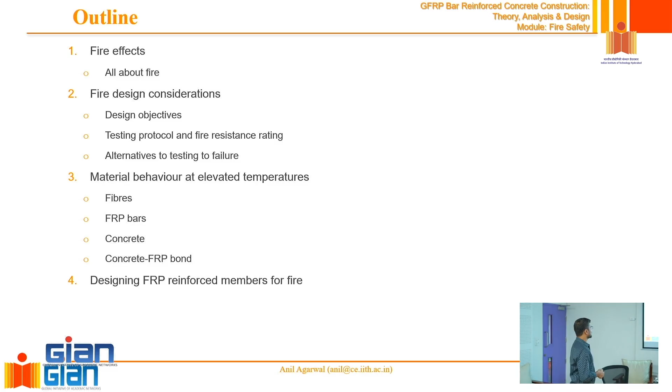For other traditional members, RC, steel, protocols are available, design provisions are available, you can design according to that. But when it comes to RC with FRP, protocols are not in place yet. So whatever knowledge we have, I will try to share some of that with you. But eventually, the gold standard is designing by testing: test the member and know whether the performance is adequate or not. If we don't want to do the test, we have to think about alternatives. We will discuss what you have to consider for the alternative route, and what protocols or methods we can follow for designing.

For fire, when we deal with it, there are several phases: initiation and ignition, then compartment fire, basically how it grows. Several parameters influence the growth of the fire. Then there is a growth phase, post flashover, and so on. There are a variety of fires we can discuss, and considerations when fire spreads from one compartment to another. That becomes critical. And then how to simulate the fire effects.

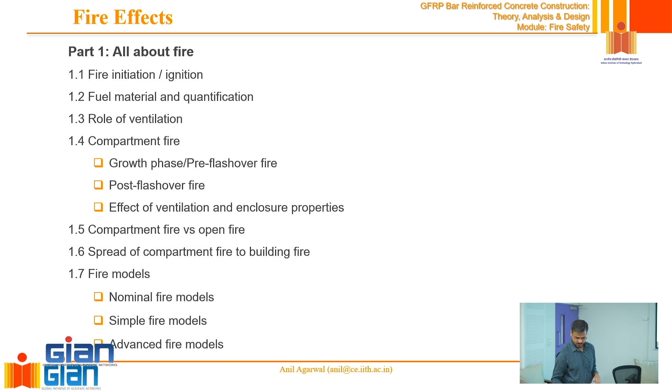So what is fire? Fire is essentially just heat, right? That's what it is. But heat does not come into any of the equations that we deal with as structural engineers. There is no heat term in any of the equations. We have F equals ma if dealing with dynamics. If dealing with statics, sigma F equals 0. These are the equations. Where is the heat term there? So how to bring in the heat term, and how to bring in the effect of heat, that we will discuss.

What does fire need, or what does it need to start a fire? Ignition temperature, an element to get burnt. Fuel, temperature, and oxygen. Very good.

So basically you need three essential components. One, you need initiation, meaning somebody should be putting in the effort - that is your initial heat source. Even if I put a combustible material, typically on its own it does not ignite. If I take diesel or petrol and spread it on some surface, it will not ignite automatically unless I put a source of heat to it. If it were to ignite that way, it would have already. So the fact that I was able to bring the fuel to do the experiment means it does not ignite automatically. Sometimes it may not be heat alone, but some kind of energy - pressure can create ignition type conditions, that too can be considered. Sometimes a spark, an electric spark from short circuiting, can create the ignition. So one source of initiation has to be there.

Then fuel is required, of course - fuel has to be some combustible material. What qualifies as fuel? Which materials qualify as fuel? There is some parameter about the calorific value. Generally what we look at is the calorific value, but that is not the entire story - I'll discuss that briefly. So calorific value, what does that mean? If I take 1 kilogram of fuel and allow it to oxidize, how much heat will it produce, or how much energy will it emit? That is the calorific value. Per kilogram, how many joules does it produce - that is simply the calorific value.

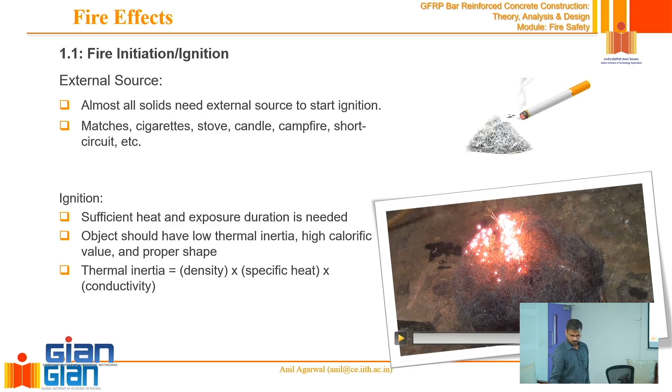Generally, we deal with these types of fuels - wood, cotton, wool. These are the traditional types of fuels we used to deal with much more often. Nowadays we have to deal with other types of fuels also, including polyester and different types of plastics, and so on.

For example, if you look at the amount of furniture in this room, except for these tables, all the rest is plastics. Maybe that sofa frame is wood, but all the rest is different types of plastics. Plastics have a very high calorific value and are very good quality fuels.

So when we say how good a fuel is, we have to look at the calorific value of the fuel. Calorific value is basically how much heat it produces when a certain mass of the fuel oxidizes, and that can be measured using a calorimeter test.

Then we also have to look at, let's say, how much FLED - fire load energy density - is present in a compartment. So if we are studying this compartment, what is the chance, or how much heat, or what kind of fire, can this room be subjected to?

So then we have to look at what is the fire load energy density in this compartment, which is nothing but all the masses multiplied with their respective calorific values divided by the area, the room floor area. So basically, what is the total fuel available in this room, converted to calories, megajoules - that is delta HCM, divided by the floor area. That's a standard way of quantifying how much fuel it is.

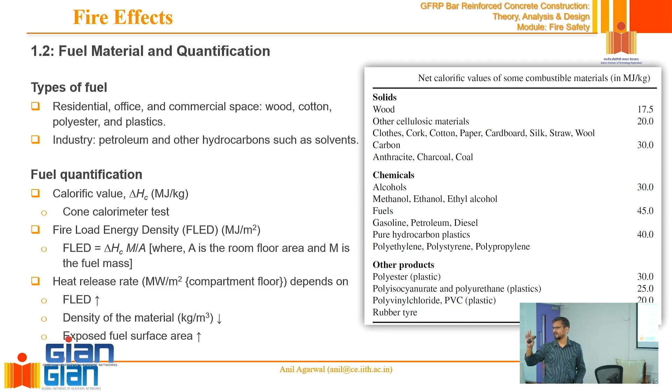Generally these can be done with some kind of simulations - tools are available, I'll discuss some of those tools - but usually experiments have been done. Over a period of time, people have done enough experiments and come up with heat release rates for different types of furniture, and that can be used as standard practice.

So let's say we have figured out the furniture in a compartment or building, and for that fuel we know what the heat release rate is - if a unit area is burning, how much heat can be generated by burning that unit area. Then the question arises: how will the fire in the compartment behave? What will be the behavior of the fire in the compartment?

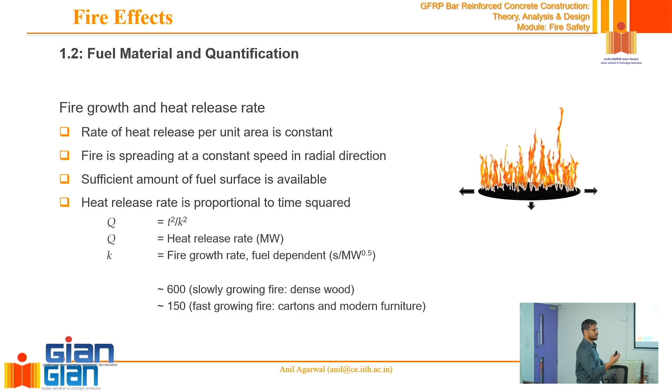Is there any quantity or quality classification, like fast, medium, and slow? So in the previous one I showed you, these values correspond to different materials. The fast one will be this kind: a fast growing fire will be something made of cartons and light materials, but with the same amount of material. That's how this classification is done.

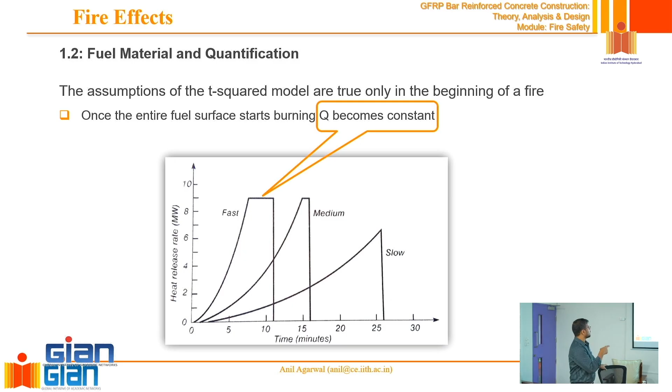Q becoming constant is basically when the entire surface area is covered, then we don't have to worry about it. The other parameter that we were so far assuming was always available in plenty is oxygen. Fuel is what we have discussed so far, and we are saying when there is a fire, the fuel is not exhausted yet, or will never be exhausted in the portion where the fire is. We have discussed how the fuel keeps getting added to the combustion process, but the oxygen part we have not really looked into.

Oxygen is very critical. In fact, most of the time, as soon as fire gains any significant size and starts to become hazardous to us, oxygen is the one that starts controlling the fire, more than the fuel. So oxygen is a very critical parameter.

If you see any typical building on fire, this picture taken from the US, you can see the flames leaping out of the windows. What does that mean? Especially in the top half of any window you would see flames leaping out, not the bottom half, always near the top.

So what is happening in the bottom half of the window? The oxygen is rushing in, the cold oxygen is rushing in. Since cold air is rushing in, it kind of kills the fire, so in that part you don't see flames. And all the half-burnt fumes, combustible material that is not fully burnt, is thirsty for oxygen, where oxygen is available outside. So it leaps out of the window to try to capture oxygen from outside. There is an air inflow and a fire outflow out of a compartment.

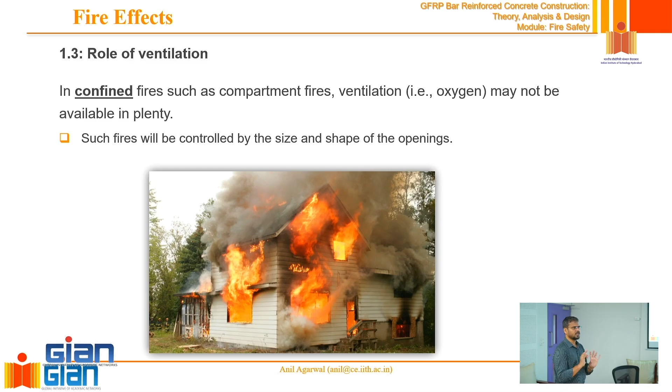If you put a sealed room with no extra oxygen supply from outside, fire won't last very long. But people will also not last very long. So basically what happens typically in a real fire—we've talked about fundamentals, some basic assumptions and all.

In a typical fire there are these phases. There is an incipient phase, basically the initiation of fire—the fuel has not burnt yet but is being heated, a spark has taken place, a candle has toppled or something. That is the incipient phase. Then there is a growth phase, where ignition has just happened, and the fire starts to spread from one corner or furniture piece to the rest of the compartment.

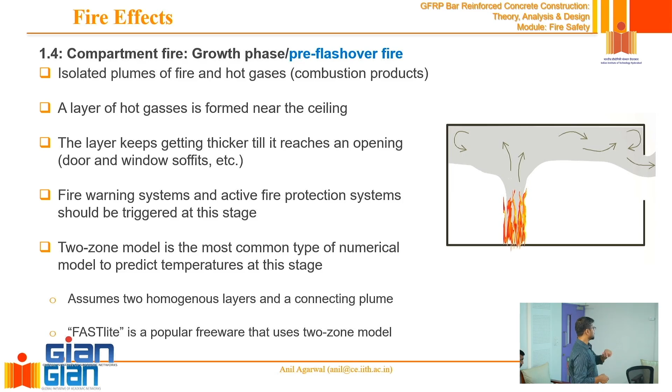Then what happens is that if, let's say, there was a fire here and there is no direct connection between this and this, still fire can jump to another piece of furniture that is sitting far away. That happens quite often, in fact. What happens here is that this plume and this layer of all the unburned gases, they start accumulating heat, because the heat is continuously being emitted from here. That heat is traveling and accumulating there, right?

And all these burnt particles or half burnt particles, they are accumulating in that area. They generate a lot of heat. That heat radiates in all directions, not just upward. Radiation can travel in any direction, right?

Convection mostly leads to travel upward, but radiation can be in any direction. Beyond a certain thickness, once there's enough mass or heat source, radiation can start coming downward on everything under it. So if there's a carpet on the floor, even though it didn't catch fire directly, the heat coming down from above can cause it to start catching fire, leading to fire spreading to anything kept inside the compartment.

That phenomenon is known as, what is the word? Flashover, right? That's a very critical word. If you've taken a course on fire, you should remember the word flashover. If you remember the word flashover, people will assume you must have learned something about fire.

So that's called a flashover point. What is a flashover point? Can somebody tell me? Just somebody from that row. Anybody? Flashover. What is a flashover point? Don't be so busy writing down, there's not much to write. What do you call a flashover point? It's written over there. I'm just trying to see if you're paying attention, or if I'm going too fast.

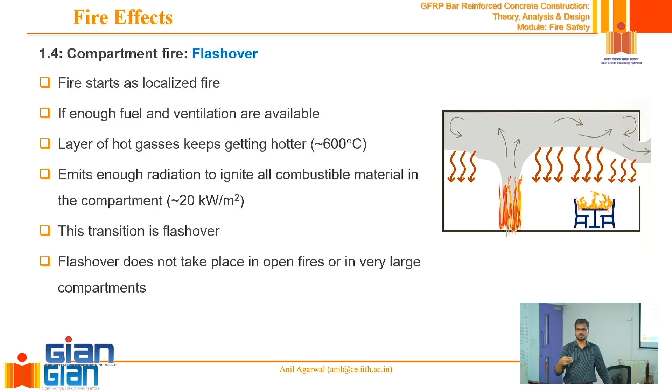But solid wood is not typically as bad, and charring is in fact helpful for us. How? We usually do charring in the wood to increase its durability. So that's another point where some people say - I'm not an expert in that - but people say it can increase its resistance against different types of pests, for example termite, its resistance can increase, but that's not the point of discussion here.

So here is an example which compares two different types of compartments. This study was conducted by Underwriters Laboratories. Underwriters Laboratories is the leading agency - it's an NGO, a private agency which basically does a lot of research and develops a big repository of different tests.

So if I'm trying to develop a fire resistance system for my building, I don't have to do the test myself. If it matches closely with one of the tests they have done, I can cite that and say this system is similar to what they have done, and that data is available - you can just take a subscription from them and use that data in your building.

And here in the modern compartment, most of the furniture is made of synthetic materials, like your chairs. So basically they lit fire at the same time in both these rooms.

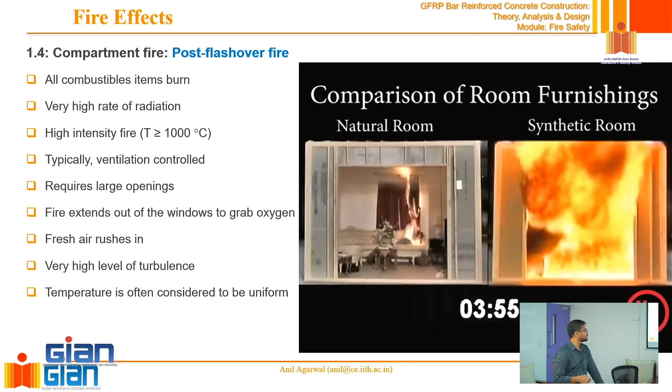And within 3 minutes, you can see the fire has grown really big. Now pay attention to this surface area - here you can see fumes coming out, right? That was the flashover point, when everything started burning without being in contact with the fire. Within 4 minutes or so, the flashover has already happened - at 3 minutes 40 seconds, flashover happened. This is the traditional room where the curtain is still burning. I think they had to use some different type of cameras.

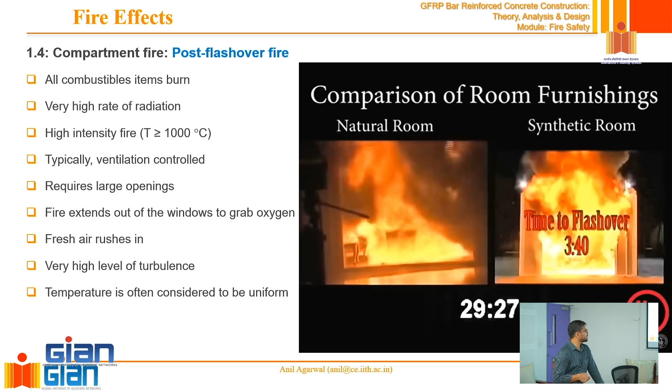So at around 29 minutes, the fire was large enough, and now you can see it spreading to everything very rapidly. At around 30 minutes, the traditional room caught fire. The point here is that you should know the difference between synthetic materials and traditional solid wood, cotton-based materials, in terms of how much heat they release and how quickly fire can spread.

But more importantly, you should be able to visualize and understand what flashover is. Typically for structures, we talk about fires which are close to flashover, not a fire localized in a compartment. Until that point, it may be a concern from people's safety point of view, and people need to be evacuated. But from a structural engineering point of view, there is not much we need to do at that time.

Sir, will you please repeat which agency has done this? Underwriters Laboratory, UL.

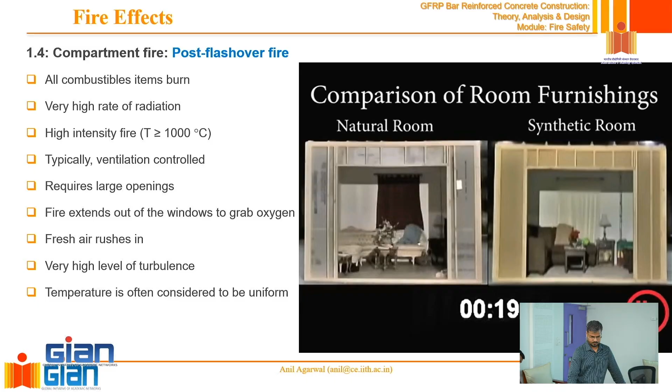So flashover typically has certain characteristics. A flashover will be ventilation controlled. Everything is burning, so fuel is willing to burn at a very high pace. What will be in short supply in a typical flashover or post-flashover fire, right after flashover? Oxygen. So oxygen will be in short supply.

So they will be ventilation controlled. If you give more ventilation, the fire will be more violent. If you control the ventilation, the fire will be less violent. So heat release rate will be controlled by the amount of ventilation available, and a lot of turbulence will be there. The benefit of that turbulence is that we can assume temperatures are almost uniform in the compartment, because air is rushing in, fuel is burning, and everything is moving very rapidly, causing a lot of turbulence.

So what does ventilation do? Whenever there is a big fire close to flashover point, typically the fire grows so large that windows, if there are glasses, will break. The glasses can't sustain that kind of temperature. At around 200-300 degrees centigrade, they become very soft, they want to expand, and thermal shock also damages them. So they break and turn into openings which allow air to get in.

The rate of burning is pretty much proportional to the area of the opening, and the height of the opening under root. So basically, if I have two identical compartments with a single window in both, same area in that window, but one window is a little bit taller and longer, the other is a little bit wider - which one allows more air to get in? Same cross-section area, same area of the window, same size of opening - the longer one allows more air.

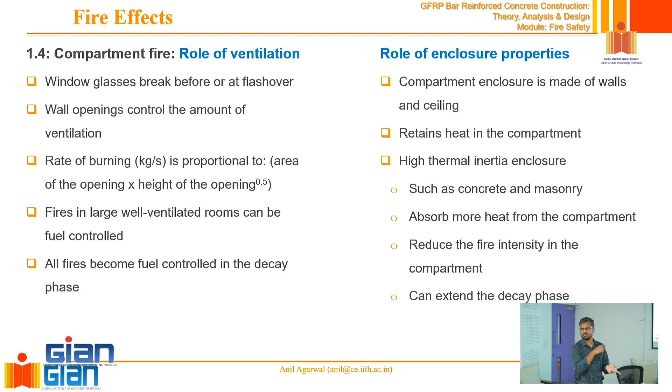So mostly in this part, the fire is ventilation controlled - it depends on how much oxygen you supply. If you supply more oxygen, it will burn faster; if you supply less oxygen, it will burn slowly. In this phase it is mostly fuel controlled, because you have not started burning everything. In this phase, it is again fuel controlled, right?

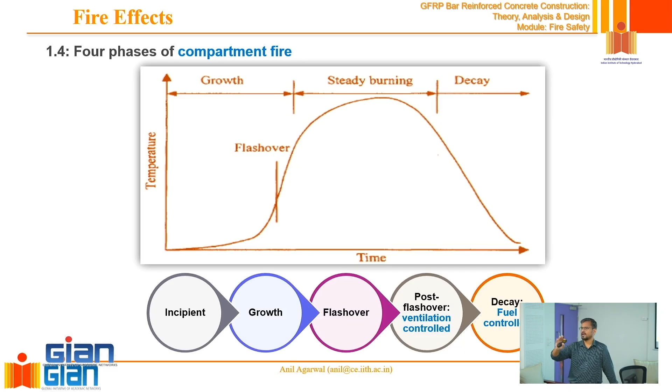So flashover is just an instant. Post flashover is when the entire compartment is on fire. That is post flashover fire.

That means at that point, ventilation is greater. When you switch from fuel control to ventilation control, is that what you are saying? That is not exactly the definition of flashover, but usually that happens very close to that point - the switch from fuel control to ventilation control - because sometimes even a localized fire can produce enough smoke that you may not have enough oxygen supply. So then it may not be fuel controlled anymore; a localized fire can also be ventilation controlled.

So this is how a compartment fire typically goes through different phases. In a compartment fire we can have flashover, but in an open fire we cannot have flashover, as we discussed. In an open fire, heat radiation can be very high because fuel could be available in plenty, whereas in a compartment fire there is a limited supply of fuel.

An open fire would be a forest fire, for example. In a forest fire there is no limitation of fuel - the fire can keep spreading as far as the forest goes, and there is no shortage of oxygen either. But still, the heat release rates will be high, while temperatures may not be that high. The reason is that the heat is not confined - if the heat can keep escaping, the temperatures of that fire may not be that high. So typically, forest fires don't produce such high temperatures for the same amount of fuel.

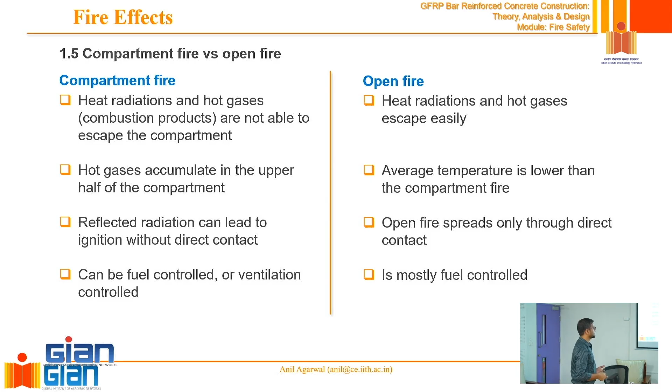And of course, since there is no flashover, fire spreads only through direct contact. If there is no direct contact, heat will escape, so there is no flashover point. And it's mostly fuel controlled because there is no shortage of oxygen outside.

From a structural fire point of view, sometimes fire in a compartment can be disastrous for the structure, but sometimes one compartment fire may not be bad enough. But there are enough examples in our lives where we have seen fire spread from floor to floor - the World Trade Center tower fires, you might have all seen the videos. Or any of the big fires in big tall buildings - there are a number of examples.

I have not included all the case studies because we are going to get into the designing also. So in any tall building, if you look at when a fire accident happens, if there are not enough safety provisions, typically fire jumps and moves upward in the building. That is a very common phenomenon that happens.

Firefighters fight the floor where the fire started. By the time they are able to control that fire, it jumps from some window or somewhere to the next floor, and it keeps moving up in the building.

The same thing happened in the World Trade Center building. From outside you couldn't see the fire so clearly, it was mostly smoke, but the fire was traveling through the building. There was one particular building in that compound, World Trade Center 7, besides the two tall towers. You all know what I'm referring to, right? Yes, WTC collapse, World Trade Center collapse, New York, 2001, 9/11.

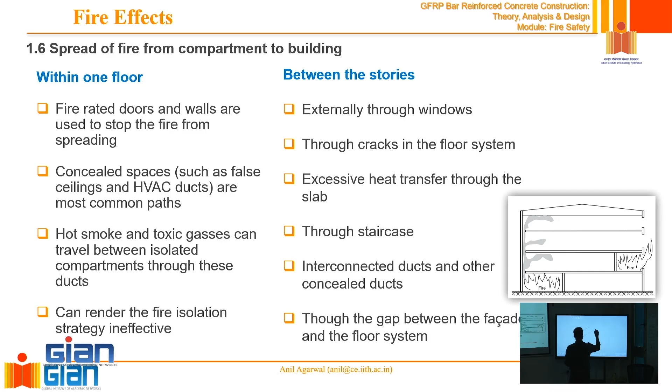So this is basically an innovation in the direction of precast construction, right? We don't want to do a lot of in situ casting. We want to be able to move to the next floor as quickly as possible.

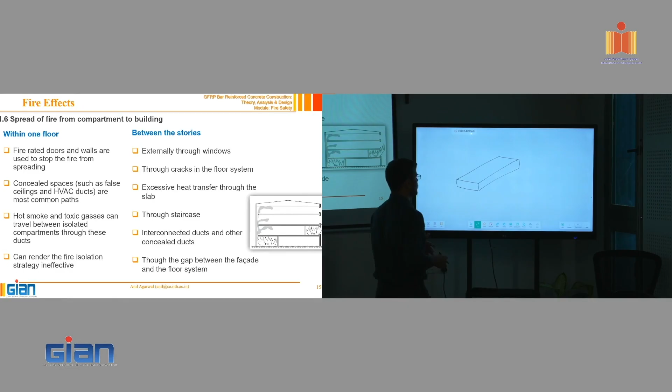In order to achieve that, we precast some slabs, and those precast slabs can be solid slabs also. But people have worked out that generally strength consideration does not govern the design of slab systems. Which consideration governs the design typically? Serviceability, right?

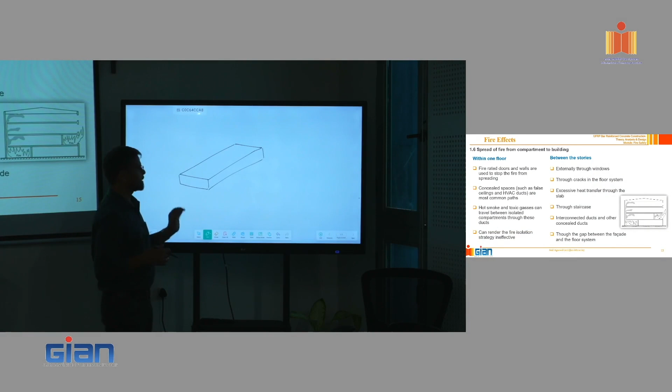So when serviceability is going to govern, let's not put too much concrete into it. What we do is cut holes, leave gaps. We put some tubes at the time of casting, and then we cast concrete that those tubes run through. So those are hollow gaps, and that's why it's called hollow core slab.

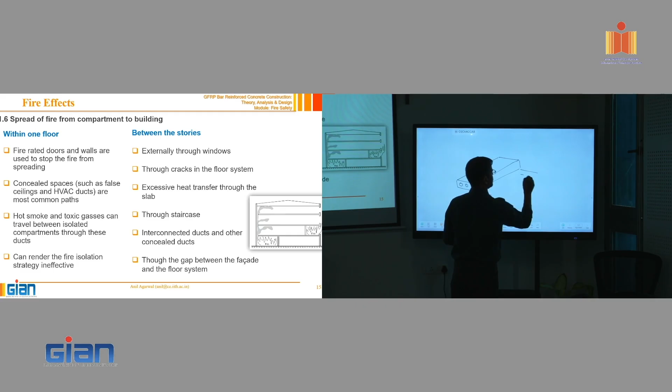And they are of fixed length. That length is basically where you will have your beams, where the supports will be. Then the next slab will be right next to it, and another slab right next to that. So you put several slabs next to each other.

Then on top of that, you put a top cover, casting one layer of concrete just to make this whole thing monolithic. But the majority of the structure is not monolithic; the slabs are separate. So if there's a fire here, the slab may want to bend or deform, and it will not necessarily bend by the same amount as the next slab, and then this joint will open. This joint will have a shearing, and then fire can seep through from there.

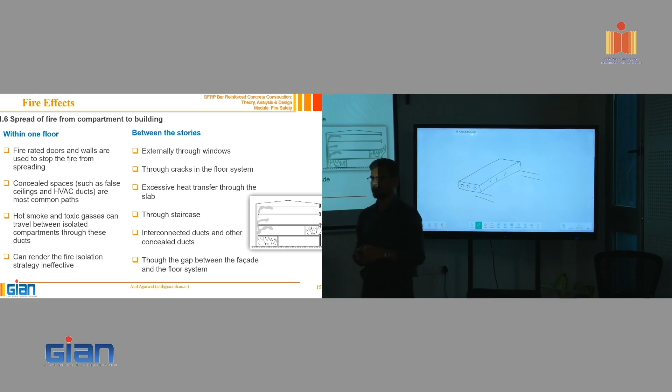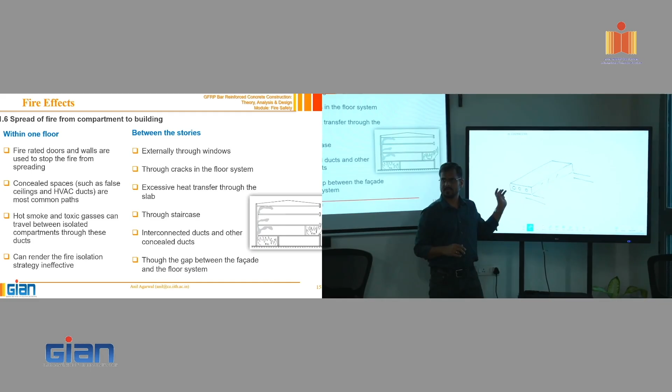Now, the hollow tubes are typically useful because they can also work as conduits. You can pass various types of piping, electric wiring, and everything through those conduits. So that's how they're used.

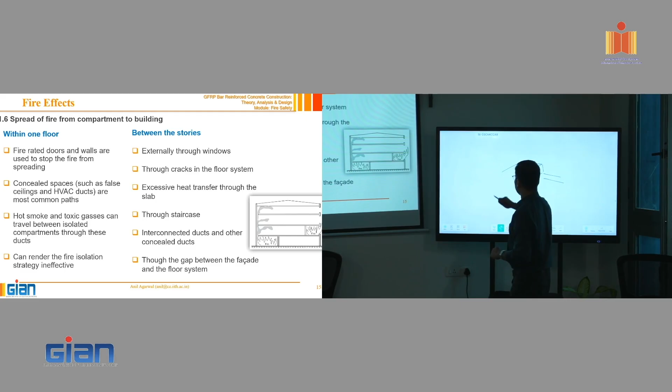The following reason is to reduce the weight of dead load. Primarily, yes, because the concrete sitting near the neutral axis does not contribute much in flexure. It helps in shear, but generally shear resistance for slabs is hardly ever a concern. So then we don't have to really...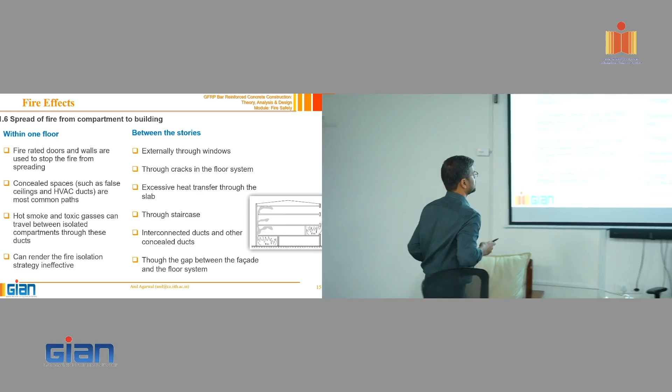Okay, I think I need to speed up a bit. Yeah, 1.5 hours is past. So...

There are 2-3 types of fires. We discussed open fire, but that is generally not a concern for structural engineers—open fires don't affect structures. Structural fires, again, within a structure there can be localized fire. A localized fire is where the fire starts from one end but cannot spread to the entire compartment, which can be very large, or for some other reason.

In such cases, models are slightly more complicated because the fire is not uniform. The post-flashover fire in a compartment is the most fearsome fire, and relatively easy to approximate, because the fire is so severe, or the turbulence so high, that we can assume the temperatures to be more or less uniform.

Because of that, we can typically model a post-flashover fire using what's called a single zone model, or one zone model. So there are two or three different categories of fire models. The very basic ones we call nominal fire models, which is basically what's used by structural engineers.

We love it, unless you are a structural fire engineer. If you are a structural fire engineer, you may want to go into simple models and advanced models a bit. So nominal fire models, from a structural engineering point of view, basically just specify what temperature the fire has—fire becomes a single entity.

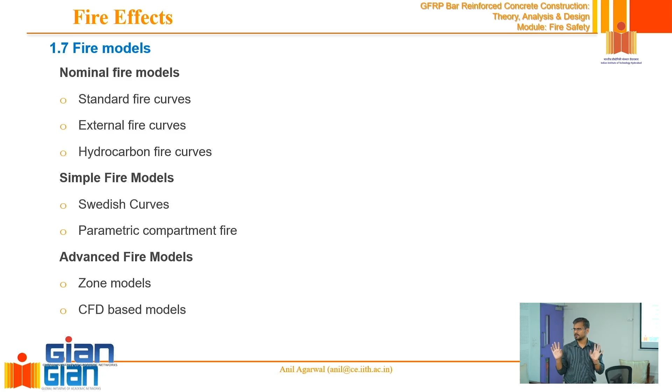There is no variety in fire. It's a single fire. What temperature does it have? Tell me the temperature. So at any given instant, it has a constant temperature, a single value, right?

So then there are 2-3 categories within that. Typically, we have a standard fire curve, then external fire curve. External fire curve might be of relevance to structural engineers if we're talking about a bridge fire, for example. So there's a fire under a bridge or over a bridge. Over a bridge fire, sometimes it may be relevant, but not often. Under a bridge fire can be many times important. So even an open fire, external fire, can be relevant under a bridge kind of situation.

Standard fire curve is typically for compartment fires. Hydrocarbon fire curve is again a compartment fire, but led by hydrocarbons. So if it's used as storage for petrol, diesel or something, then we would call it a hydrocarbon fire.

What does the word external account for? Open fire. External is basically not inside a compartment. The fuel is sitting outside, right?

So there have been several accidents. In case you're not familiar, in the US in the last 10 years, I've heard of at least 3 major accidents where the bridge almost collapsed or collapsed completely. Major severe damage to bridge structures because of fire. Fire was basically lit under the bridge. There was one incident when a diesel tanker carrying diesel hit the column, the pier under the bridge, and caught fire. That led to a big fire under the bridge. That is a very plausible scenario. It happened, but people had never accounted for it.

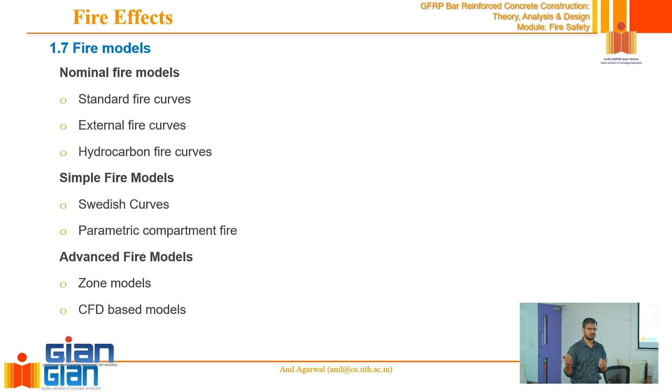Single zone model will be useful for a post-flashover kind of fire. 2-zone model will be useful for a pre-flashover, localized fire. Then there's CFD based - computational fluid dynamics, where you add chemistry to it - and such models are available. If anybody is interested in learning, many of them are available for free, so you can download and try your hands on it.

You can see it has a very high rate of fire growth, temperature growth. In the first 10 to 15 minutes, the temperature goes to almost 800 degrees centigrade, and then gradually it stabilizes and goes almost up to 1100 or 1200 degrees centigrade.

ISO 834 curve is available in ISO. It's used by British standards, Eurocode, and Indian code also, so that is universally accepted. Americans use the ASTM E119 curve.

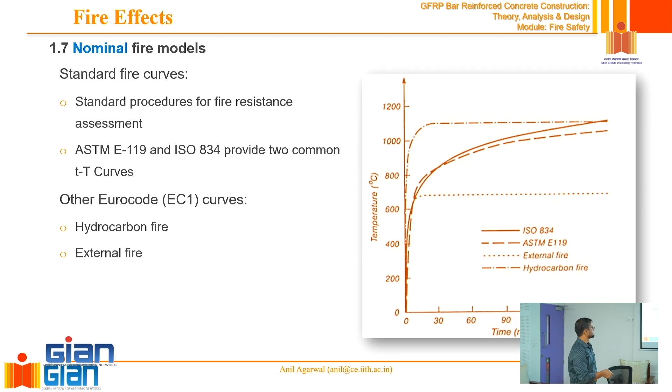And then we will follow it, and there is no decay phase in the standard fire, right? So there is no reduction in temperature. The temperature keeps going up or maintains at around 1100 to 1150 degrees centigrade, staying constant but never coming down. That is the standard fire curve.

There are a lot of problems with this standard fire curve kind of approach. I don't have time today to discuss all that. Basically, the cooling down of fire has been studied to be almost as detrimental to structural safety as the heating is. So it's not just the heating - it is during the cooling that many structures have been found to collapse, not just the heating.

So if we do a standard fire test where we just heat it for 1 hour, and we say everything was safe, you take away your specimen - you might be at fault, you might make a mistake there, because you have to wait for it to cool down also and then study the behavior.

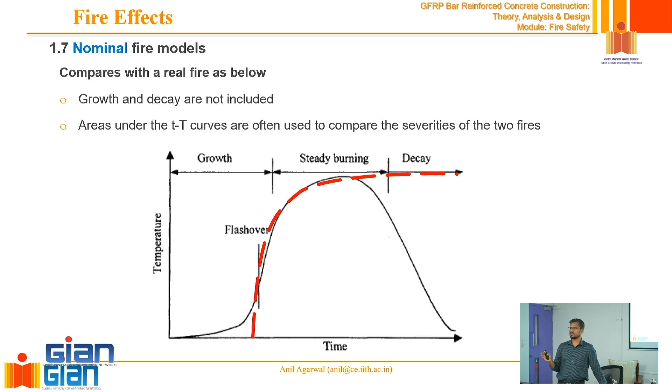Similarly, how many windows does the compartment have? We have discussed so much about windows and everything, but the standard fire curve does not account for the window size or number of windows. So all those things can be incorporated in a different curve.

There was a first effort in that direction, a parametric study, experimental empirical study in the 1970s, where two researchers - most of this research was done in Scandinavian countries, Northern Europe, where a lot of research has happened in fire - basically came up with 2-3 parameters.

The FV parameter is basically the ventilation factor. You remember we talked about ventilation being proportional to how much area of ventilation you have, how much window area you have, and square root of how high the windows are. So that comes as a parameter, normalized against the total area of the enclosure.

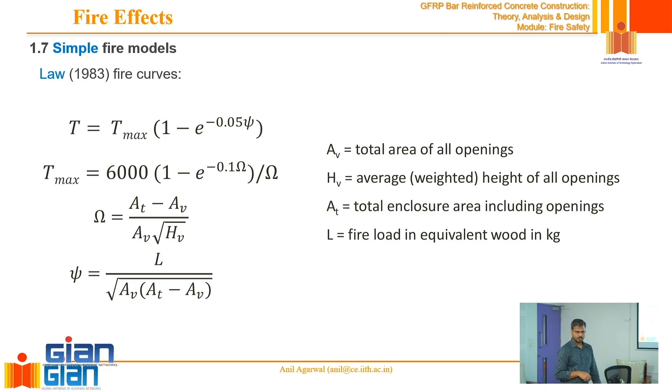There are other sets of equations which also give kind of parametric curves. I won't go into this one, but it's very commonly used nowadays. If you're planning to use any such parametric equations for predicting fire, this is the one you can easily refer to. It's very nicely detailed, in that slide, in the curve.

Here we can see that the higher calorific value of the fuel will have a higher fuel load, from the equation. So can we conclude that if the fuel is of higher calorific value, it will have the same curve as the upper curve, this type? No, sir, it's the down curve, this type.

So basically they are not saying how they increase the fuel load. You can increase the fuel load by increasing mass, or by changing the type of fuel, that's what they are saying. So they are reporting this curve only in terms of megajoules per meter square. But it will vary, because as we had seen, Q was a function of T square divided by K, heat release was a function of K. That K has not come into this picture, so it's somehow standardized in these equations, they are not allowing that variation of Q or K.

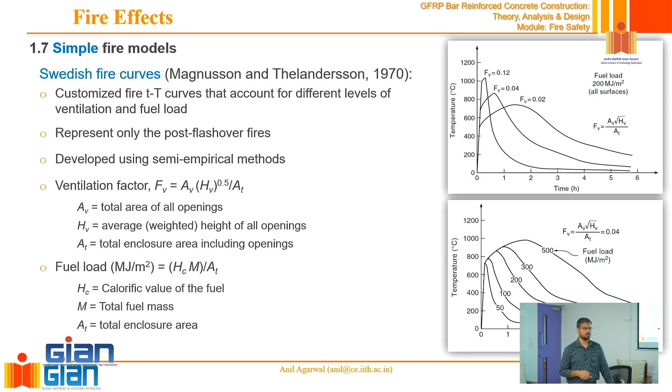You can go to the Eurocode parametric curve, just search on the internet. I haven't written the reference, but it's Eurocode 1, EN 1991-1-2 or something like that. There, a lot of these equations are available, where O stands for opening factor. You remember the first set of equations where we had curves showing an intense fire with short duration and a low intensity fire with long duration. You can get that same thing with these parametric curves also.

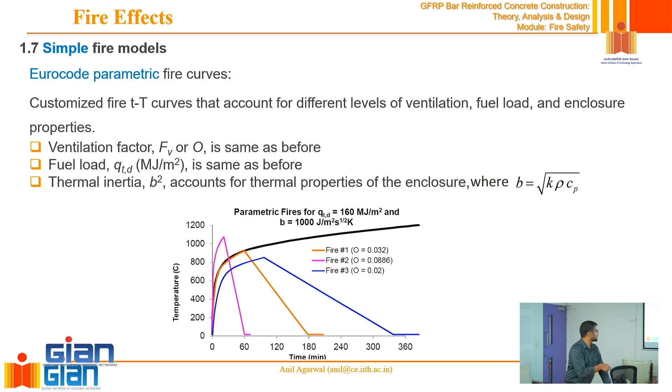They also have three factors to be brought in. One is thermal inertia, basically what kind of walls and slab you have. If your walls and slab are made of heavier, denser materials, they will absorb much more heat. Similarly, fuel load, how much fuel load you have, and how much opening space you have. All of this can be fed into these equations, which I have not reported here, but basically you can get this kind of curve.

So far we have seen two types of models. The nominal model was basically the standard fire curve, where you had just one curve for all tests, one for the compartment, and the other curve Eurocode gives for external fire. So two curves basically.

Then we got to simpler models. Simpler models take into account the surrounding wall density, the openings, and how much fuel is actually available, and then you can develop the exact curve with the increasing phase, then declining phase, all that. So these are two models. The third model is more complex, where you really want to account for fuel density and do a physics-based energy balance.

So these are one zone model, zone-based model, or one or two zone model, and then CFD-based model. CFD-based model is the most complex one, closest to real physics. For CFD-based modeling, you can download software called FDS, available for free on the NIST website. NIST is the National Institute of Standards and Technology.

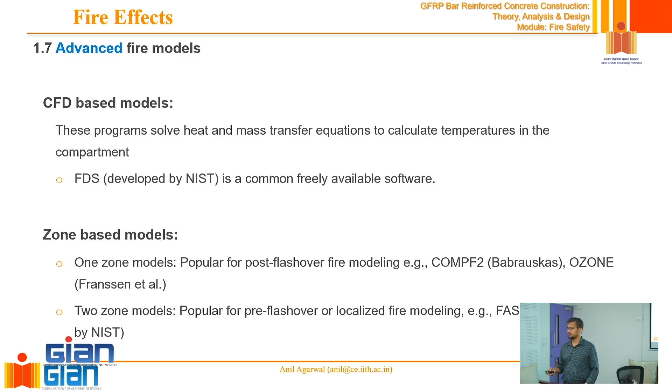That software is available freely, and even the manual is available. You can download it and teach yourself a little bit. It's quite handy to get an idea about what type of time-temperature curves can be expected. Otherwise, there are one zone or two zone models, mostly softwares, so you have to download them, and some are available for free. You can try your hands on them and try to get what temperatures you can expect for what kind of fuel density.